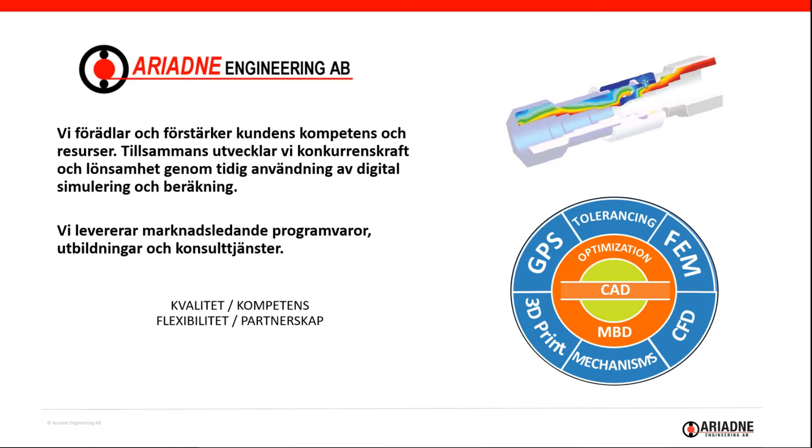Om vi tittar på bilden till höger med våra kompetensområden så utgår vi från den digitala CADen i mitten. Har vi all information i 3D-modellen så blir jobbet mycket enklare när man kan utnyttja det i övriga operationer, till exempel toleransanalys som vi ska titta på idag. Det underlättar väldigt mycket, men har man det på 2D-ritningen så går det absolut att göra en toleransanalys också, men det blir mycket manuellt handpåläggande då.

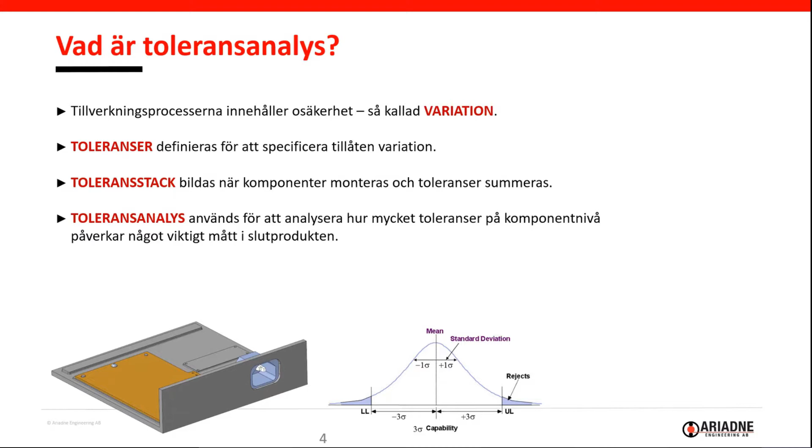Varför ska man göra en toleransanalys? Konstruktörerna måste försäkra sig om att bitarna går ihop och att det fungerar och blir en robust konstruktion. Produktion vill veta om de kan tillverka den och hur mycket kassering det blir till exempel. Så det handlar om ekonomi till slut, det måste vara lönsamt.

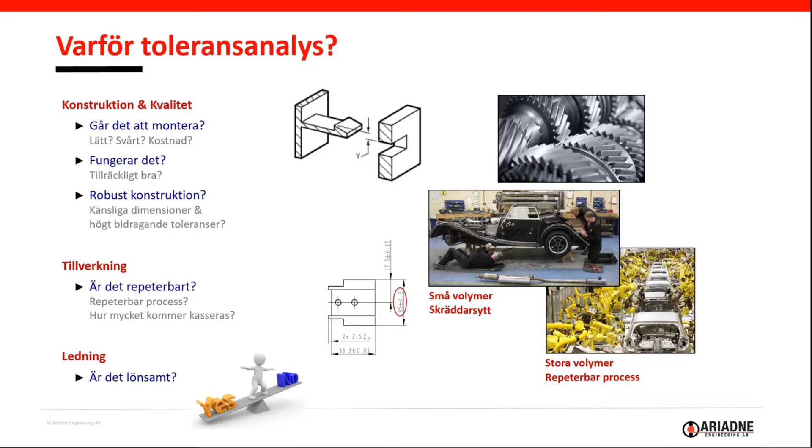Fördelar med en toleransanalys är att man får svar på alla de här frågorna. Man blir klar med projekten i tid och vet att de fungerar, för det gäller att vara snabbare än sina konkurrenter, snabbare ut på marknaden. Det finns länder med lägre kostnad på arbetskraft, så vi måste jobba smartare, och det är vi duktiga på.

Det hjälper vi er med. Man vill ha nöjda kunder, och blir det billigare med ökad kvalitet och minskad support, ja, då får man nöjda kunder.

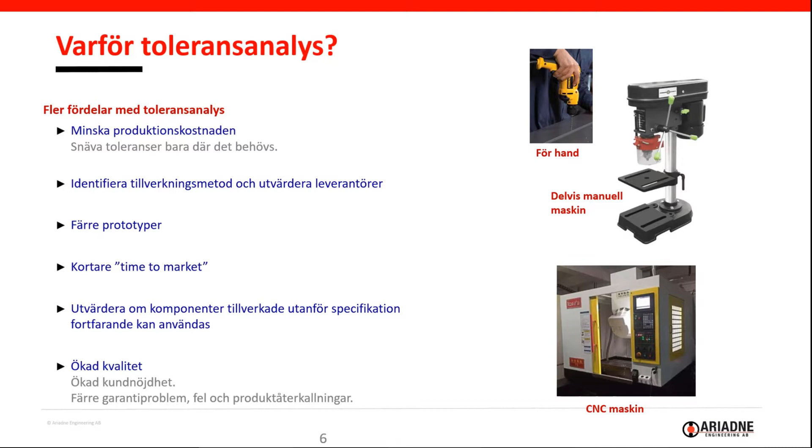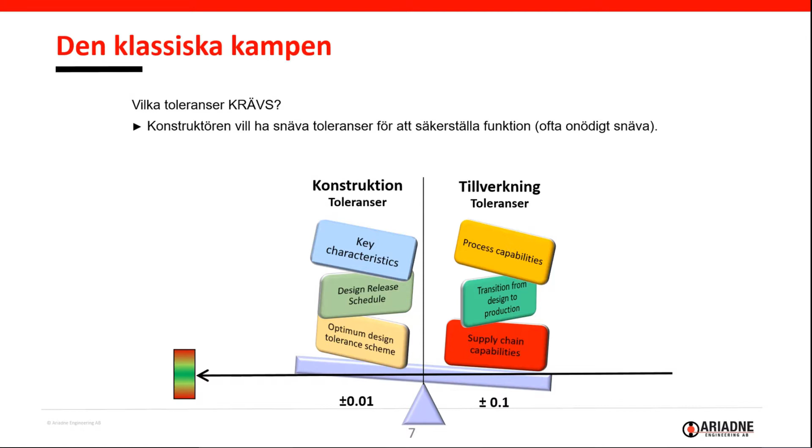Vi har den här klassiska kampen, som vi kallar det, om vilka toleranser som krävs. Konstruktörerna vill ha snäva toleranser, eller ofta sätter de onödigt snäva toleranser för att vara på säkra sidan - där tajtar vi till. Medan tillverkning vill ha lösa toleranser för att sänka produktionskostnader och få ihop grejerna, för att få den här balansvågen att peka rätt.

Det är precis vad en toleransanalys gör, så att man har det svart på vitt och vet hur man ska optimera toleranserna för att få en optimal produkt.

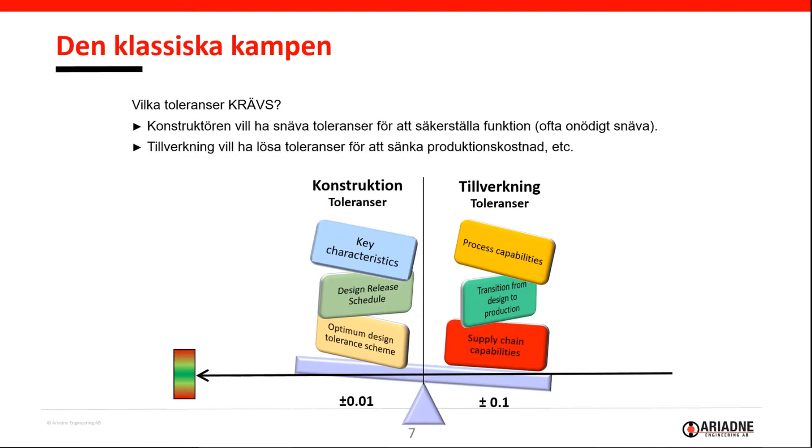Då lämnar jag över till Felix här som ska göra en demonstration av EZtol.

Thank you, Patrick, and welcome everyone to this demonstration. My name is Felix, I'm an application engineer at Ariadne Engineering, and I'll show you EZtol. EZtol is available in this form for SolidWorks, Siemens NX, and CATIA. It's also available as a plugin for Creo Parametric and Autodesk Inventor.

I'll give a short technical demonstration and show you how EZtol compares to a simple Excel stackup. In this case, I'll load in a 3D model. I'll have a SolidWorks assembly right here, but as I said, you can also open CATIA products and Siemens NX files.

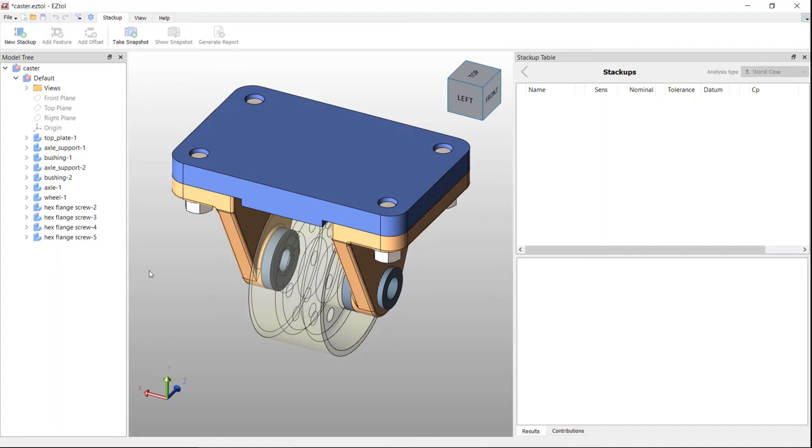So the model we're using today is right here. Call it the caster wheel, it's something you might find under hospital beds or shopping carts. I'll just move right over to the analysis, and just hide a few parts here.

The first thing we're going to do today is analyze how well these two bushings align. We don't want them to be off center too much, because otherwise we can't fit in our axle and wheel properly. So I want to investigate here the coaxiality.

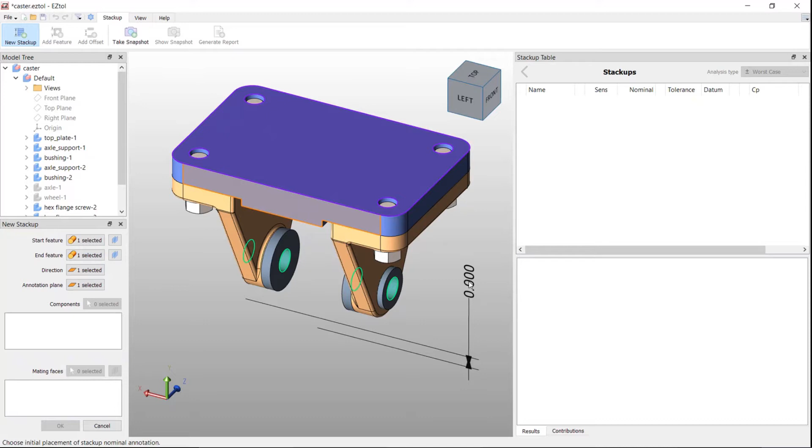I place my annotation in the graphics window, and then I'll define my tolerance chain. First, I'll select all the parts involved in the loop. So we start with the bushing on one side. Next part is the axle support, plate, axle support, and bushing.

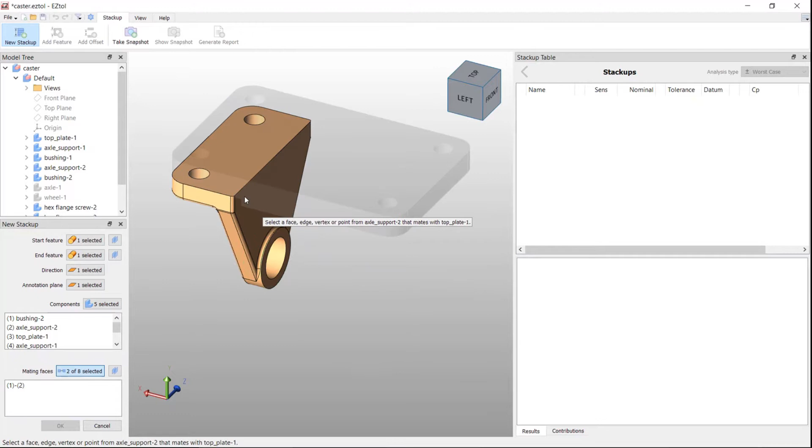And after that, I'll simply select the mating interfaces like that, go around the loop, and just like that, I've defined my stack up. So it's really easy - the interface is super intuitive.

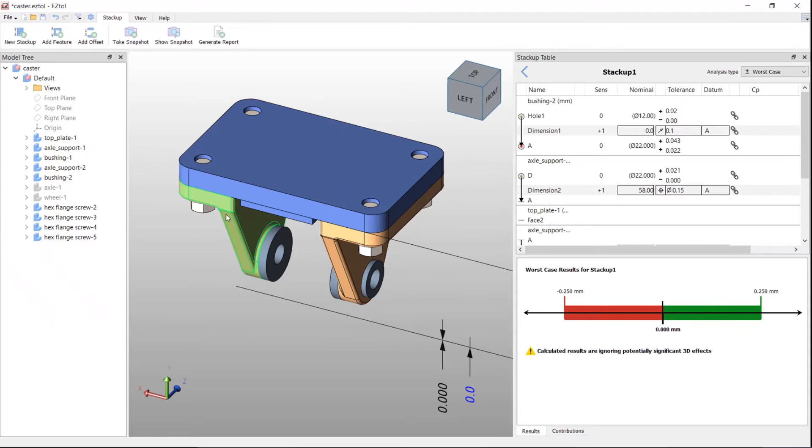Since you have the 3D model, it's also very visual. Just click OK, and just like that, I have defined my analysis. So in the graphics window, we see all the nominal dimensions right here. Can move them a little bit closer to have a better picture.

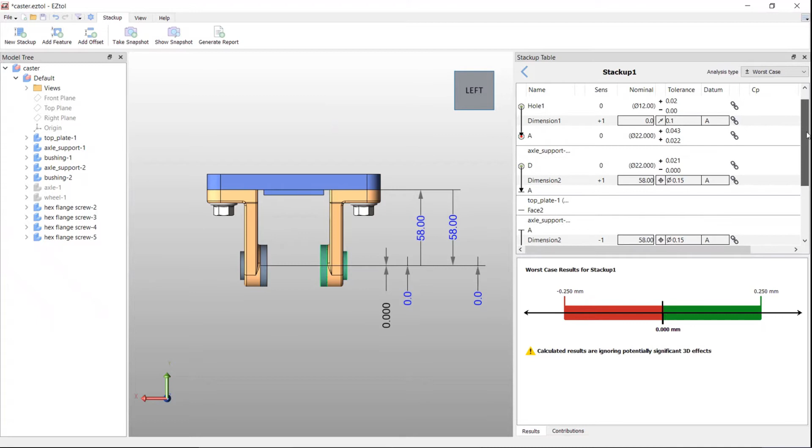And then here on the right-hand side, I can see all my dimensions and tolerances. I just have to give it a name. I'll just call it coaxiality.

Put in a requirement. In this case, I want them to be within maybe 0.15 millimeter, and like that, I get my result down here. So in this case, worst case result, you can see my requirement is plus minus 0.15, and then I will get as a result plus minus 0.25. So I don't quite reach my requirements.

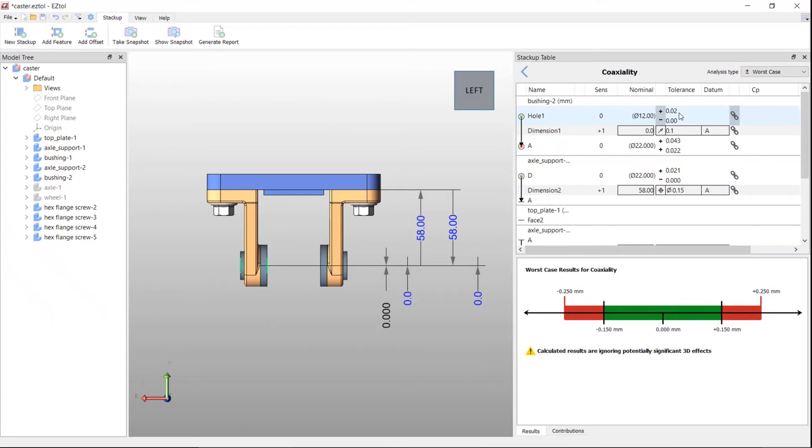But how do we get the result? Pretty simple. Right here, we can see we have all the parts, and then we also have the tolerances right here in the middle. So for example, here we have the inner diameter of the bushing, which is nominally 12 millimeters, plus 0.02 minus 0. And then we have a runout tolerance here of 0.1, referring to datum A, and then we have the outer diameter of the bushing. You can see all these tolerances have this chain link icon right there.

That means I've imported them directly from my 3D model. So if you have tolerances defined within the 3D model, you can reuse that information for your tolerance analysis and greatly speed up the process. As you saw, it took me less than a minute to define this tolerance loop and have a look at the result.

Of course, we don't just support worst case analysis. You can also have a look at the statistical result. So for example, like this, down here, we have our target quality. In this case, capability of 1.33. So that's the quality we want to reach. This is a very common denominator in the automotive industry.

And then we also have the so-called predicted quality. So that's what we can expect from our current tolerances we've assigned to the model. Currently we can expect 1.18. So not quite our target, but already close.

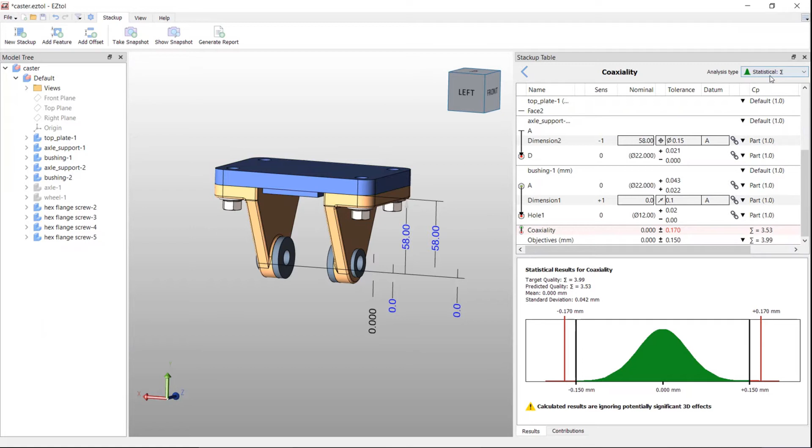So EZtol will automatically give you not only a worst case result, but also a statistical one. And you can choose not only capability, but maybe you would like to work with a sigma value, or for example, defects per million units. That's also available. So there are quite a lot of options to choose from, and you can easily switch between them, which makes it very convenient.

Additionally, you get this message, which says calculated results are ignoring potentially significant 3D effects. This is great information you won't get from a simple Excel stackup. This says that this analysis might not just be a simple one-dimensional stackup, but could have 2D and 3D effects we're currently ignoring. This is just to help you maybe think over your model and do some additional calculation to get a more precise result.

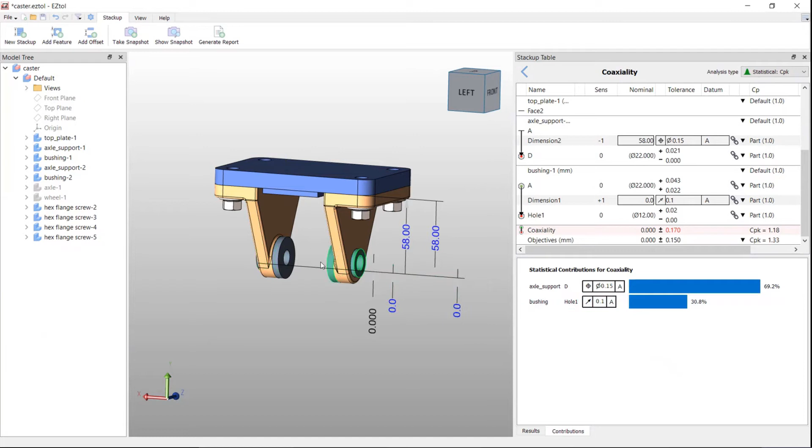But let's have a look at the contributors as well. So here we see all the tolerances currently involved in the stackup. We have runout tolerance 2 times for the bushings, and we have position tolerances for the axle support, also 2 times. So right now, we are not quite on our target.

So what can we do to improve the result? Well, we can, of course, tighten some of the tolerances. For example, this tolerance right here, currently I've set it to a position tolerance of 0.15. Let's see how our result would look if I put it at a position tolerance of 0.1. So let's change that.

Let's take away - oh, it doesn't want to change. Why is that? Well, it's because we still have our chain link right here. So if I imported the tolerance from the 3D model, I have to first break the link and then change it. Just to help you remember that after you finish your analysis, double check where you've changed the tolerances and then save that information maybe in a drawing as well.

So I'll go down to 0.1 here. Now I can see we're quite a lot better. So again, target quality was a capability of 1.33, and now the predicted quality is 1.5. So now we are well within our limits.

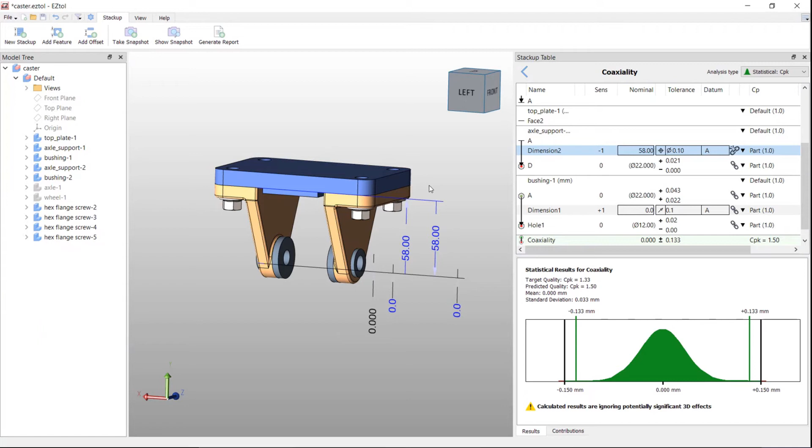All right, of course, for your usual model, you not only have one specification you want to analyze, but multiple instead. So let's add another one. We have our coaxiality up here. For the next one, I'm going to add the axle and the wheel as well. So right now we want to investigate the distance between the wheel and the top plate right here.

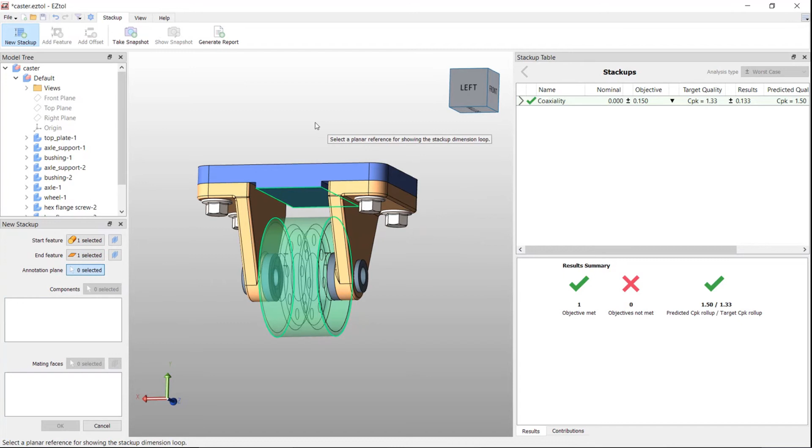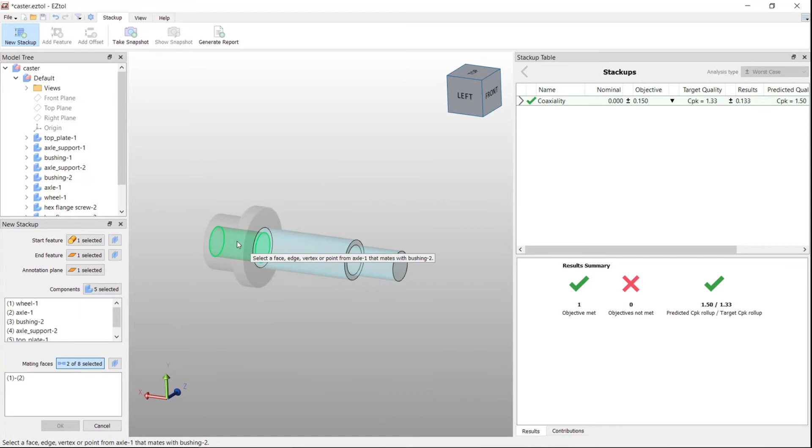So you can see, I put my dimension right here. Again, I'll just select all the components which involve the tolerance stackup, and then select the mating interfaces. It's a really easy and fast procedure. And like that, I've defined my tolerance stackup. Click OK, and I can see here on the right-hand side all the tolerances.

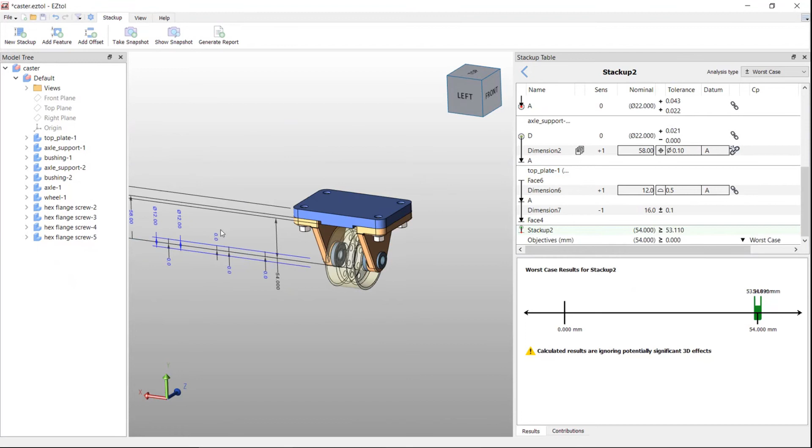I want to give it a name. Let's just call it wheel clearance, and an objective as well. So now you can see currently I'm measuring from the center axis of the wheel. It's not really what I want. Of course, I want to measure from the top. So I change it. Here we go.

So nominally 14 millimeters, and I want to put a lower limit on it. So we always want to be maybe above 13.5. And just like that, again, I have my worst case result down here.

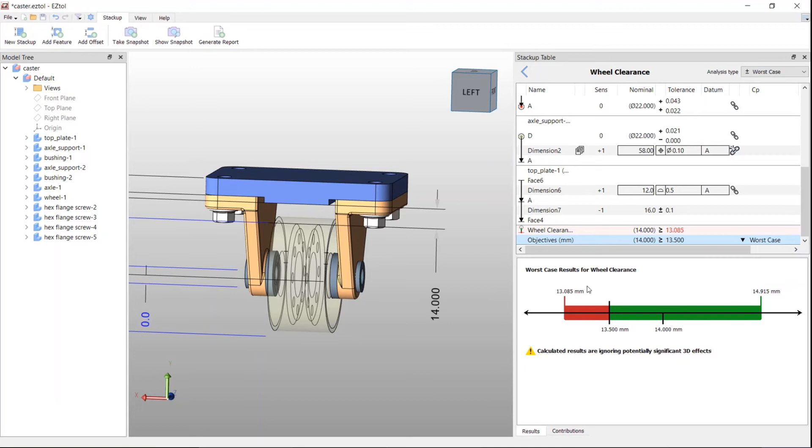What else do I have? Of course, all the tolerances I've imported from my 3D model, but up here you can see there's no chain link icon, so there weren't any tolerances in the 3D model. And that's no problem, we can work without the 3D annotations.

You can put tolerances directly into the EZtol application as well. So for example, the wheel has a nominal diameter of 80 millimeters, and let's put in a symmetric tolerance of plus minus 0.15. Of course, I could also put in plus minus or limits as well.

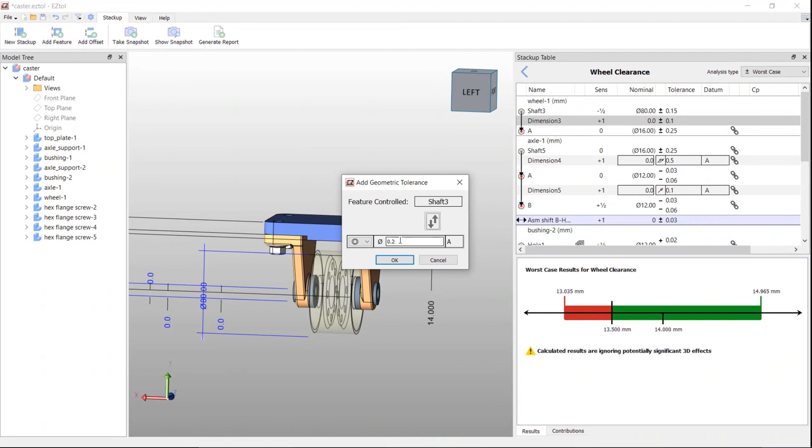And then here from the inner diameter to the outer diameter, I want a geometric tolerance. In this case, maybe coaxiality 0.2, and my datum reference is A. So again, it's a very easy procedure to add tolerances manually to your stack-up analysis.

Down here, you can see something called assembly shift, and EZtol automatically calculates the clearance between the axle and the bushing. So currently we have clearance there. That's not something you will get out of a simple Excel stack-up, but EZtol will automatically look at the nominal dimensions and tolerances.

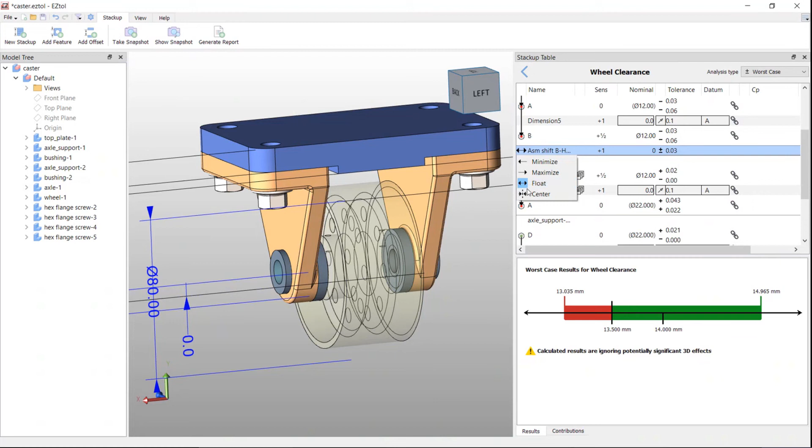And then I can say, do I want to maximize, minimize the clearance? Do I want to center it or put a float there? In this case, I want to minimize it. All right, and again, we have our worst case result down here.

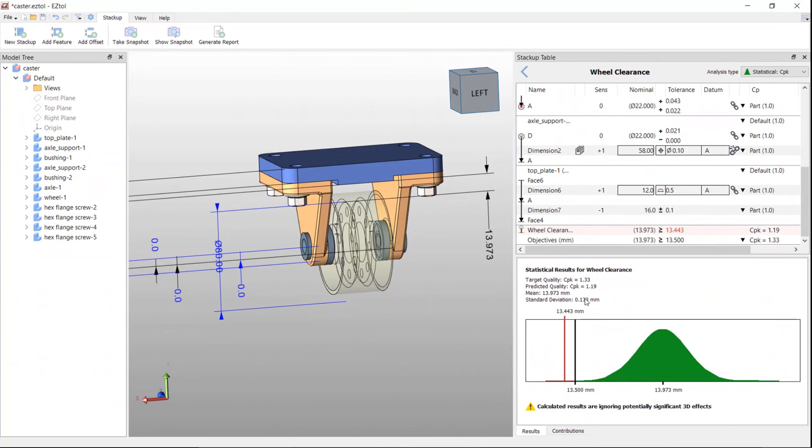Can switch to statistical maybe. You can see again, target quality 1.33, predicted quality 1.19, so we're not quite there yet. Could have a look at the list of contributors, so quite a few tolerances in the chain.

And in this case, we have two which have very high contribution. So if I want to improve my result, it would be probably good to tighten one of these two tolerances.

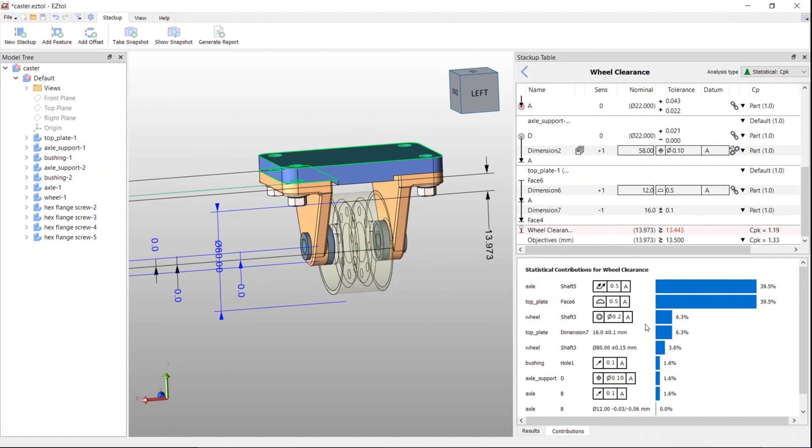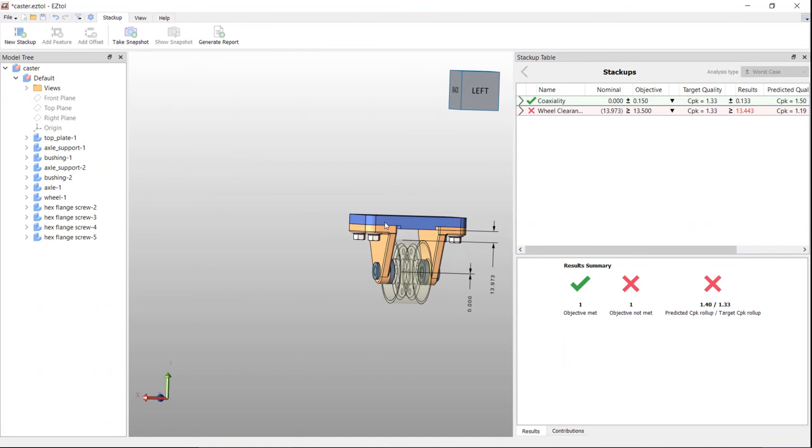When I'm done with my analysis, what I can do is share this information with my colleagues. For that, I can generate a report within EZtol, take a few snapshots, for one of the main assembly, maybe like that.

And then, of course, for each stack up like this, and then just click Generate Report. Where do I want to save it?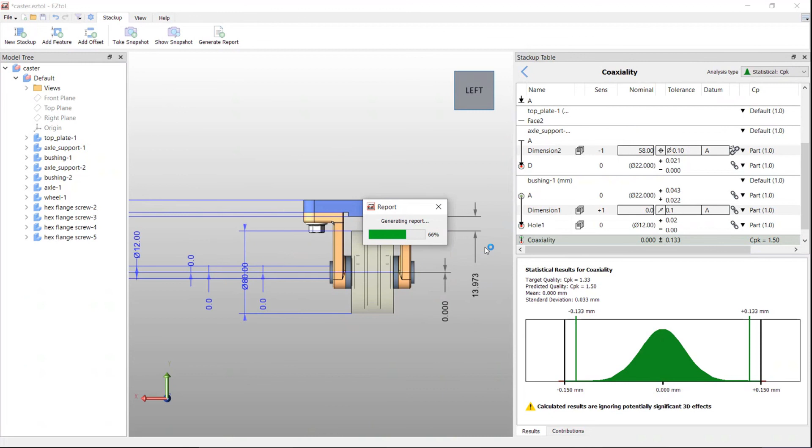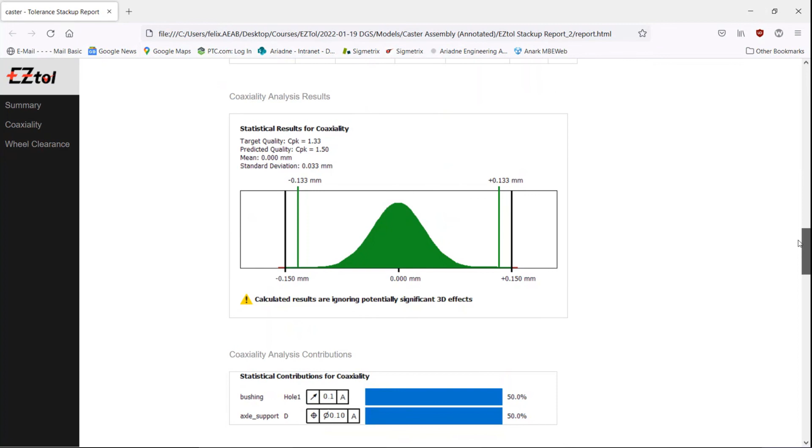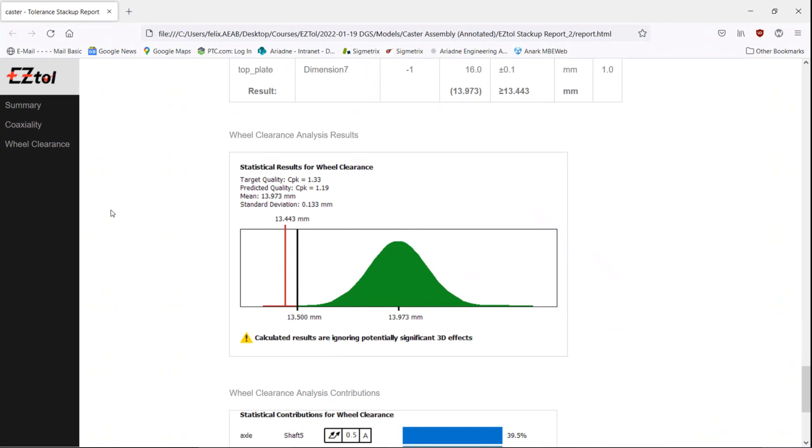And then it will automatically create an HTML document, which has the screenshots I took, the main assembly, the two stack ups I generated, and then also some information of each individual stack up, the coaxiality, the result there, and the wheel clearance, all the tolerances within the chain, and the result. And this you can, of course, share very easily with your colleagues.

All right, what happens when I'm done? Well, I can save this information in a separate file called an EZtol file with an association to the CAD model.

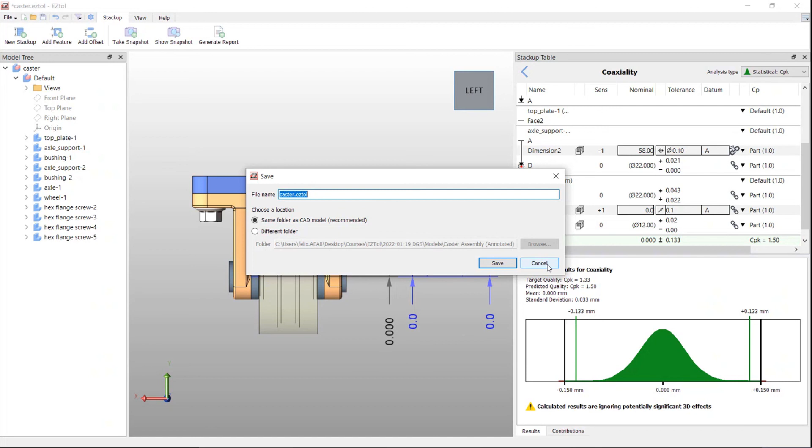So if I want to add another analysis later, then I can just simply open that file. We'll find the associated CAD model and open that as well. And then I can continue right here.

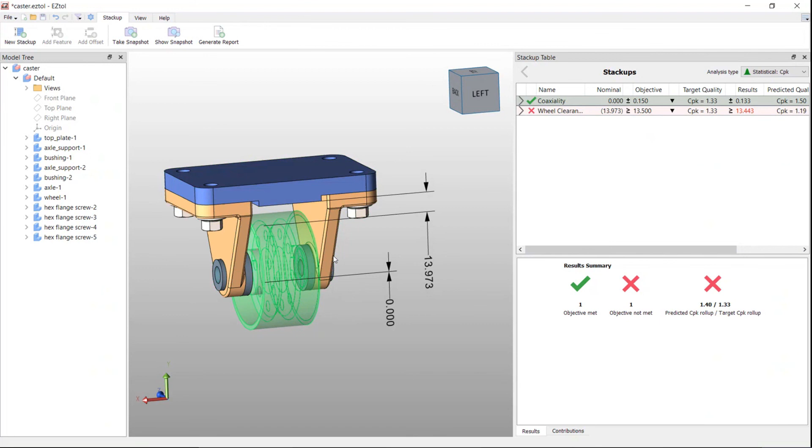If I want to do any design changes within the CAD model, I just go to SolidWorks, change my model, and then I have the option right here to reload the CAD model, and it will automatically update first, of course, the 3D model and also the analysis.

So all the nominal dimensions, and if I did changes to the tolerances, they'll automatically be updated. So I don't have any extra work there, and I'm always kind of on the newest release.